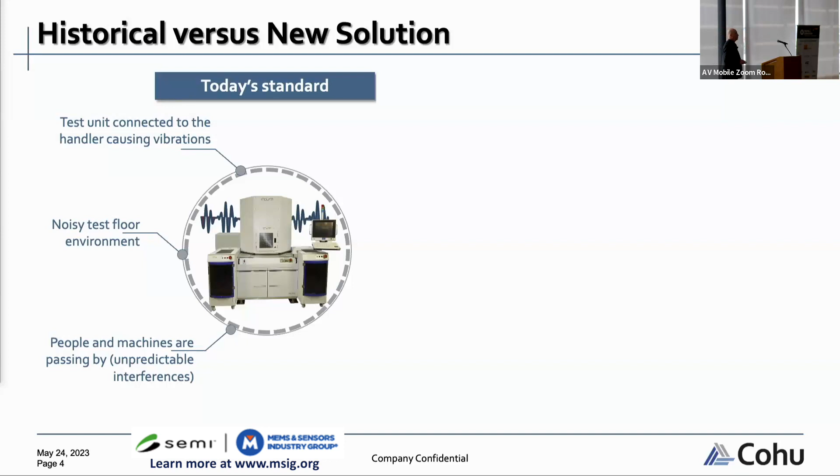So noise has a huge impact on the effective test. So at Cohu, we were thinking, well, we look into the future now where we're becoming more and more MEMS sensors in everyday lives. What's the best approach? So we kind of flipped the coin, so to speak. And we said, let's focus on the device and the test. Let's develop the stimulus first, and then figure out how we handle the devices to get them into the test environment.

And so we realized that we need to decouple the actual stimulus unit from any handling mechanism. By doing that, you minimize any interferences, but you also have a design that maximizes the DUT freedom. And by doing this, that gives you the most flexibility to ensure that any noise, whether it's mechanical noise, electrical noise, or general noise, has the least effect on the sensor itself. So let's focus on the DUT.

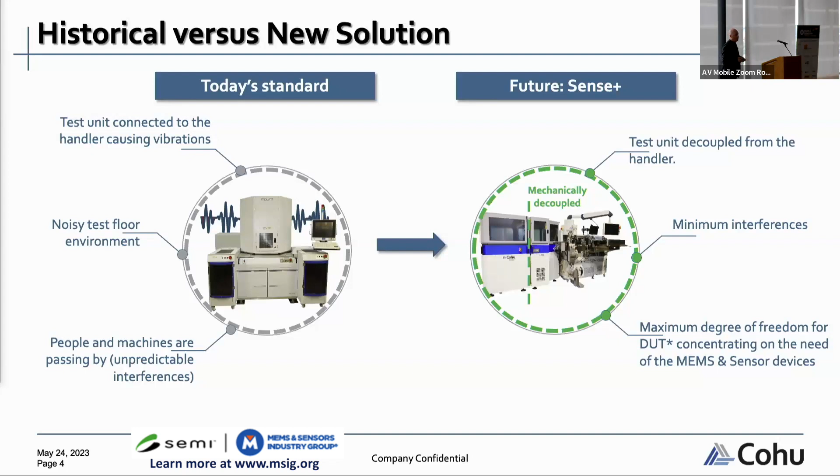So one of the first things we came out with, we call it G-Sense. G stands for gyroscope. It's very high parallelism, up to 250 in parallel, depending on the package size. As you can see from the little animation there, we have the two dynamic axis. And we eliminate the maximum noise and vibration in the system itself.

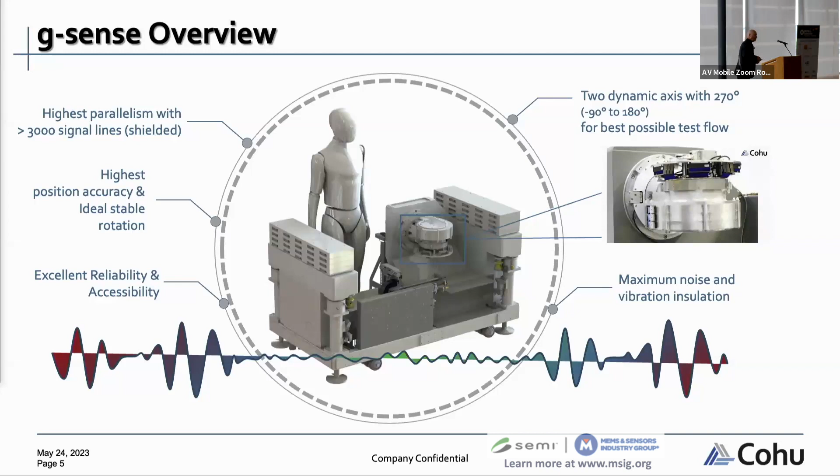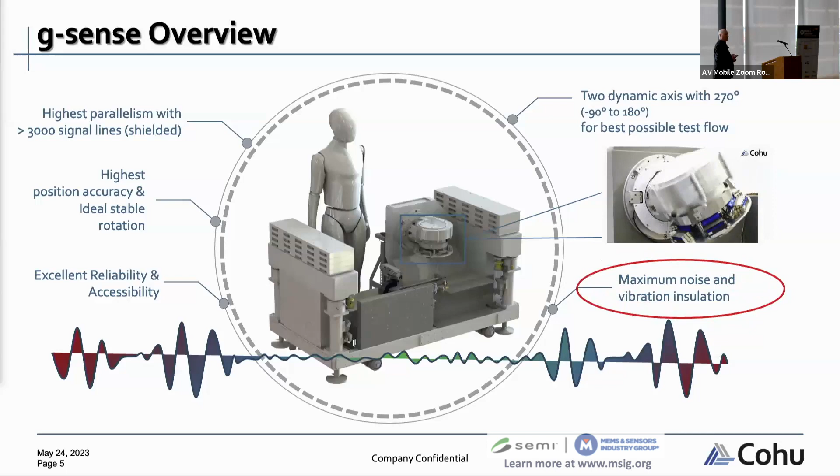And how do we do that? So we said to the designers, let's focus on the rotation axis first, because typically that generates noise when you actually rotate the device, or in this case, there's several devices. And so we focused on the noise and the vibration that could reach the DUT based on the design. This presentation is more focused on the results and the data as opposed to the system itself.

And as you can see here, we are using a fiber optic measurement system on the rotational axis itself. This is not mounted onto the system yet, we just wanted to measure the noise. And as you can see in the chart, the very key factors here is the wow and flutter for gyroscopes. They really affect the calibration of it when it's running.

And the customer specifications we see at the moment, they need less than 0.5%. When we measured this using this fiber optic measurement, the largest measurement we found, as you can see in the screen here, is 0.095%. And that's including the measurement noise itself. That's why we have a nice green smiley face there.

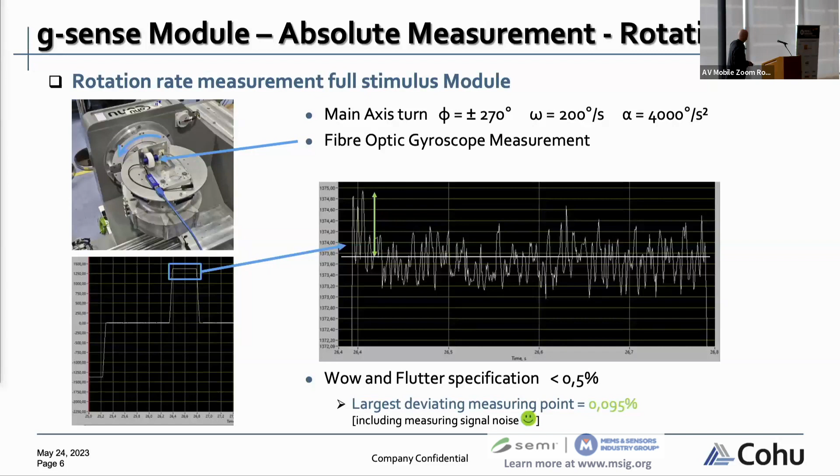So we know now that the rotational axis doesn't generate noise. But now you've got to realize this system is going to run in a production flow environment. So you're going to get people walking past, you're going to have people shouting, you're going to have machines running next to the machines. So the next factor we've focused on for the noise is the decoupling from vibration.

And so we set up, as you can see in the photograph, we have a sensor on the rotation axis itself, and we also put one on the floor right next to it. And we had an apprentice driving the forklift truck back and forth past the machine and screaming and shouting and playing music. And as you can see on the red line axis is the actual effect on the floor.

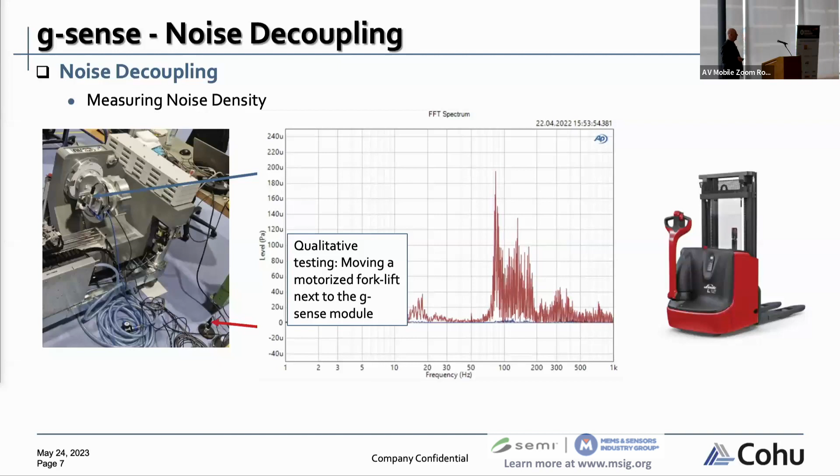And on the blue line, which you can hardly see, the blue line axis is hardly impacted at all. So we actually can not only isolate the electrical noise, we now can isolate mechanical noise that you get in a production environment, which is very key when it comes to the calibration of the next level gyroscopes that we see in the market.

In addition to this, we also focused on microphones. As we know, before COVID there was supposed to be a big ramp in high SNR microphones for voice activation and voice security. We're seeing it in more and more devices today—cars, I just got a new one and I can talk to it. It's weird, the car answers back, but it can pick me up when I'm driving as well.

So we focused on two aspects of microphones, especially for high SNR levels. You can see in the picture on top, we put a GRAS microphone on the outside to measure external noise, and inside our sound isolation chamber, another low-noise GRAS microphone to measure internal noise when we played some pink noise. Even at an 85 dB level of pink noise, internally we measured around 13 dB, which is a really accurate sound isolation from external noise.

The reason we focused on this is because usually for testing microphones in a production environment, some people have to build anechoic rooms, which is very costly and not very good in an OSAT when it takes up space.

People also said, fine, you don't need an anechoic room, you can isolate it from sound noise, but what about vibrations—people walking past, trolleys going past? So we said the best way to test this, since Cohu has its own turret systems, is to bring a turret system, put it next to the isolation chamber, and run full production mode on the turret itself. The turret generated noise of around 87 dB, and for those who've been in a production flow environment with turrets, they're really noisy and cause a lot of vibration. We were able to isolate the vibration from inside the sound chamber as well, also down to 13 dB.

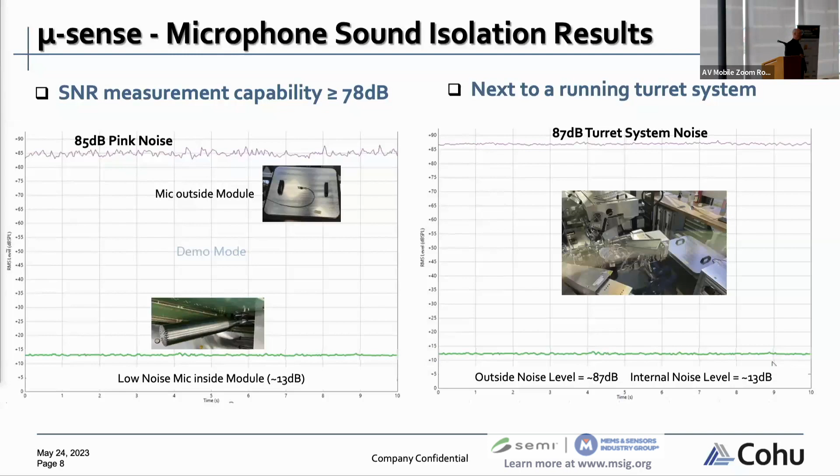So when a customer came to us and said, fine Nigel, you can isolate all this, but what is the effect on a DUT? I'll give you a DUT of 74 dB—can you test it in a normal production environment without anechoic rooms, with normal people going past and vibrations, and what type of data can you get from it?

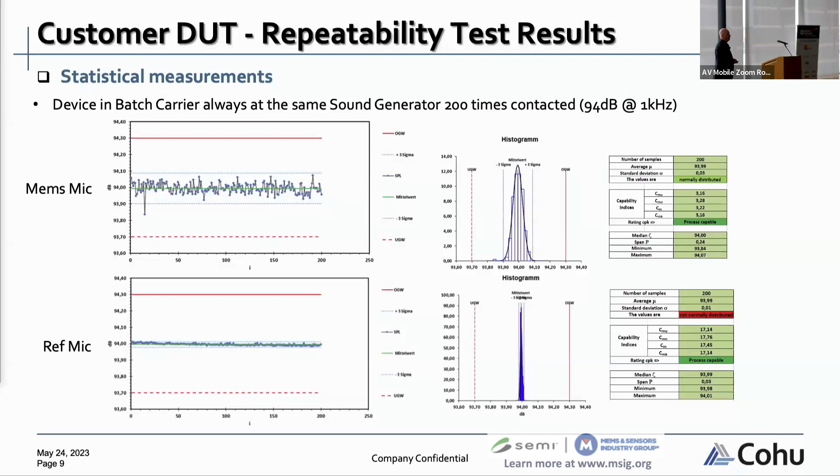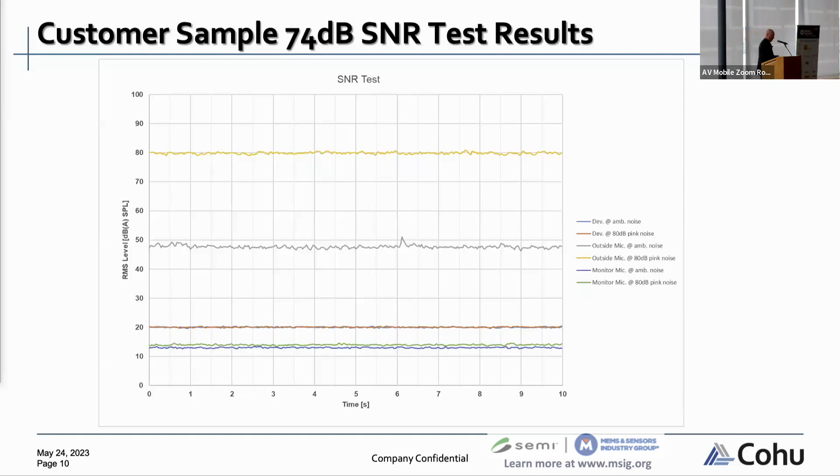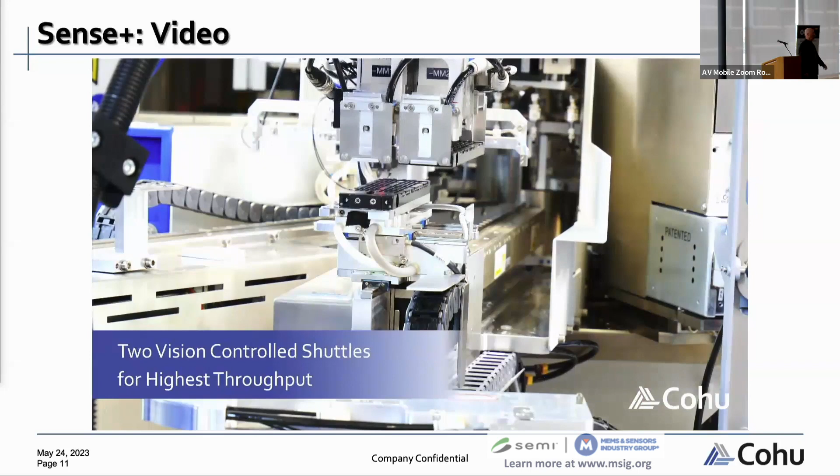This system is available, and I have a little video running in the background while I talk through it, because it's a very fast system. We call this part Sense Plus—this is the base system model. It's completely mechanically isolated from the stimulus, and you can move different stimulus in: a gyroscope test, pressure test, microphone test. It really depends on the stimulus.

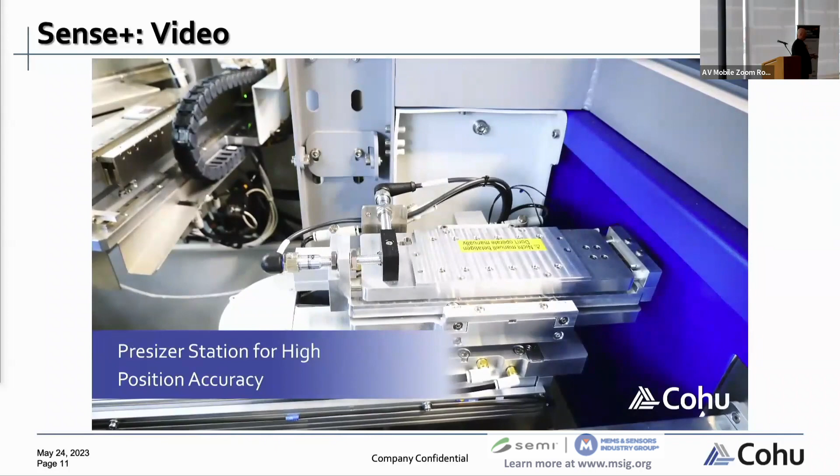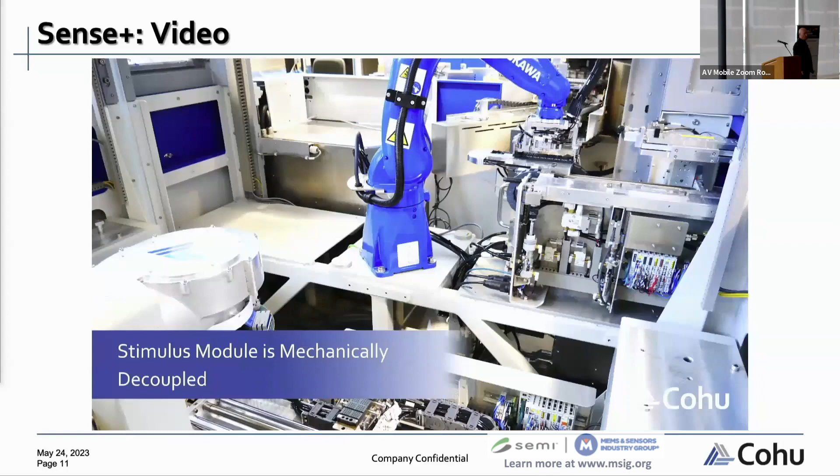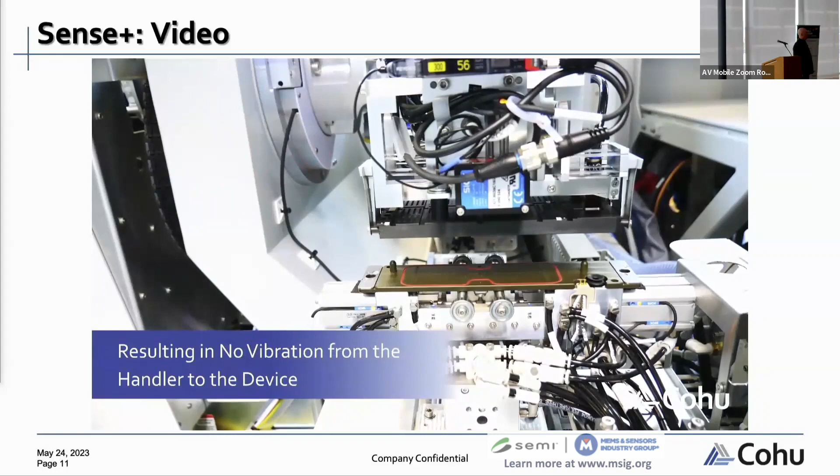We're not using a standard handling system. As I said in the beginning, we focus on the DUT and then figure out how to get the devices there, so we decided to use a robotic arm with a carrier where all the devices are put inside, up to 250. The robot arm can then pick them up from the handling system and transfer them to the decoupled stimulus system. The advantage of this is there's no effect from noise, whether mechanical, electrical, or general noise.

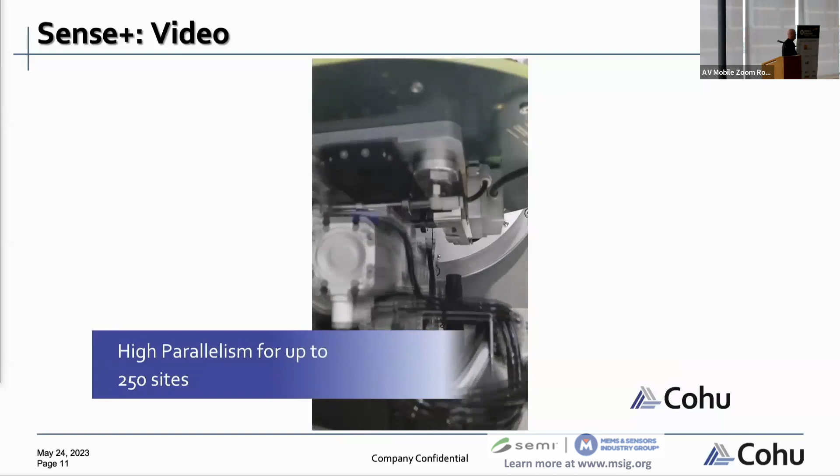After this, for the gyroscope test, it goes to the gyroscope—this is 192 devices in parallel for a customer. We have a stable angular velocity, and after it's finished, it exchanges tested parts for non-tested parts.

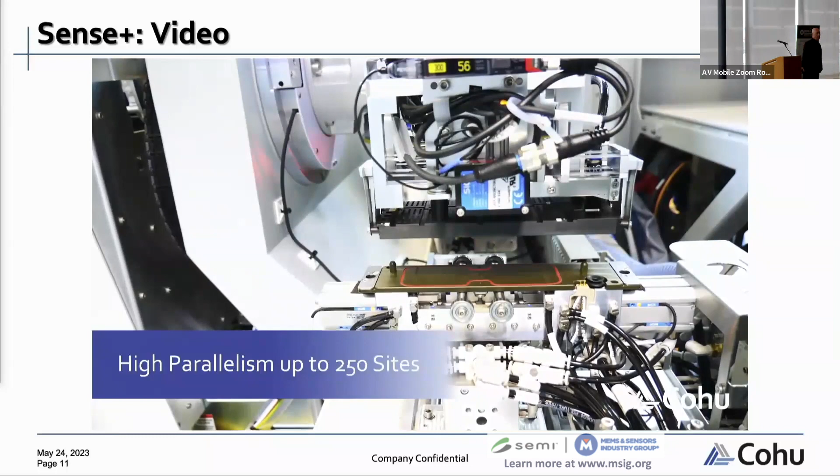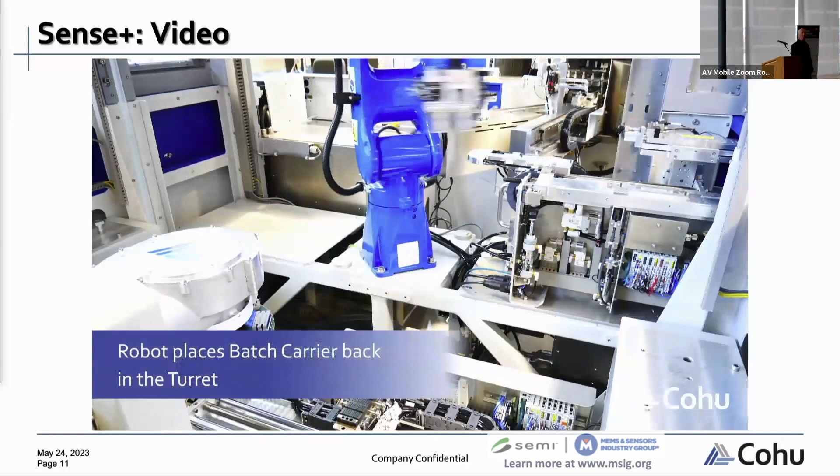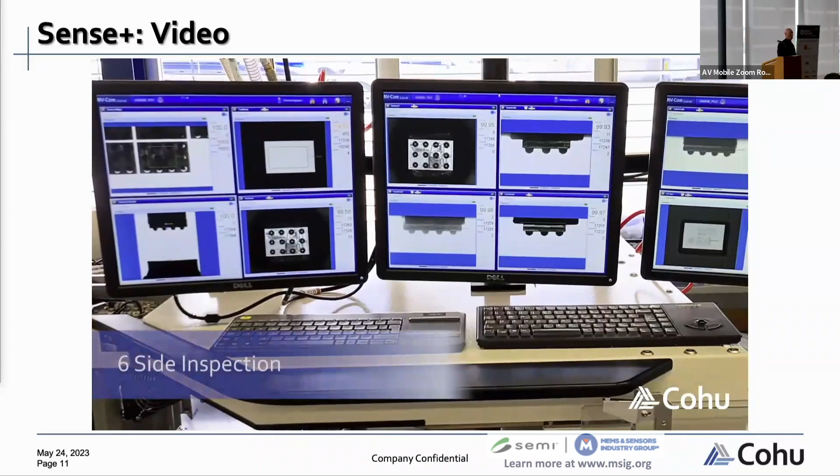It then goes back to the Sense Plus model, where we do full 6-side inspection. So you're having the same system doing the inspection and then going to tape and reel—instead of waiting to go to another department for finishing, you can do everything on one system with the highest specifications available in the market at the moment. Here you can see the 6-side inspection, and that is the Sense Plus system.